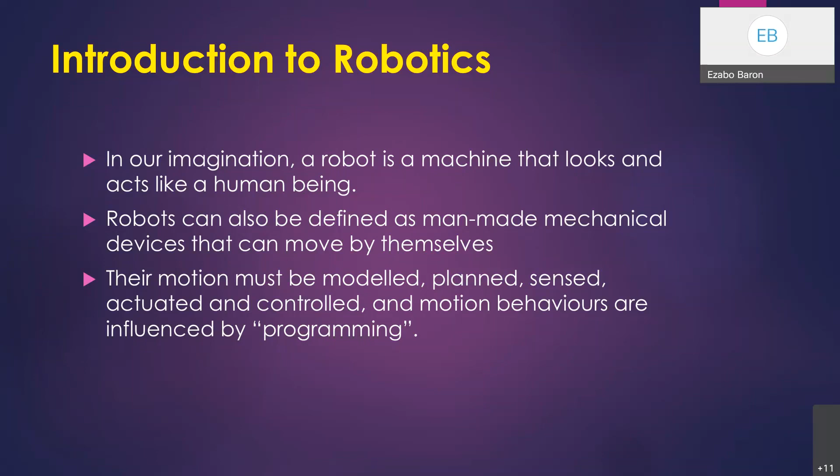We are still on the first page of your presentation. Maybe if you move the slide, the reaction didn't happen on our end. Maybe I'm viewing on my phone, I can see the slides moving. Maybe you should relog on your side. Is it the same problem for everyone? I've logged on my iPad and on the phone I'm seeing the slides moving. Maybe another participant is experiencing the same. Yeah, same problem. Okay, so I should reload the slide. Can you see it now? Okay, let me stop sharing and share again. Can you see it? I am able to see it, but still on the first page. Now what I need to do... I don't know, let me send it to you on WhatsApp, and then you upload it and share it on a computer. Is that okay? Yeah, it's okay, you can share with me, then I'll share. Okay, I've shared it on your WhatsApp, so let me stop sharing the screen, then you upload it for me. Okay, let me download.

Is my screen visible from that side? No. I started sharing, maybe... it says starting to share content, but nothing is appearing. Okay, it is now visible, I can see it. Oh, you can see the page. Yeah, and then you can make it full screen.

Okay, as we try to make it full screen, I think we are on that page. We're talking about this drone. This drone, as we said, is similar to the previous robot you saw on the cover page of my slide.

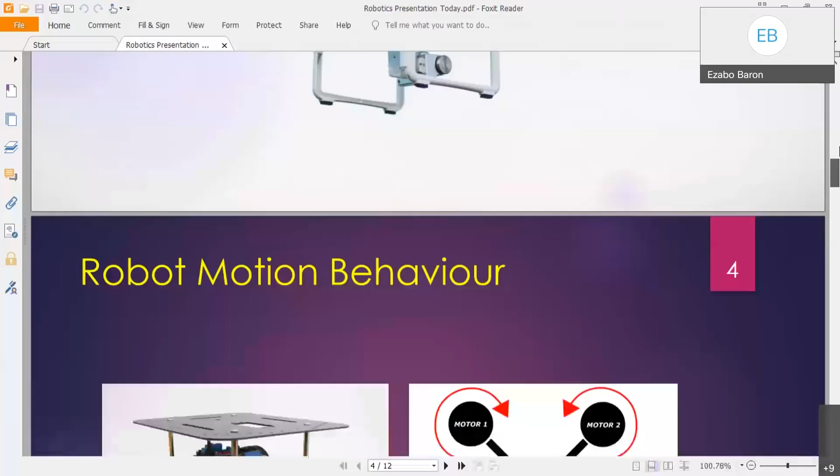Okay, it has gone off again. I think there are problems, let me check. Okay, I think it's okay now from your side. It's not. Yeah, it has come now. You can make it... okay, we are there.

So I was saying that the drone uses sensors, ultrasonic sensors and infrared sensors, for motion manipulation, object detection, and all that. But it is also incorporated with additional technologies like GPS, global positioning systems, to be able to navigate. Some have cameras attached to them. Some are remote controlled, meaning someone is either using a mobile app or a remote control specifically designed for drones. So it depends on what someone is using: a smartphone app, a drone remote control, or it is flying on its own through motion algorithms fed into it with the aid of GPS. So those are some of the important areas: sensors and also incorporations.

If you are using a smartphone to control it, then you are going to need to know how to program it using Android Studio or something like that - Java is very important. Let's move to the next slide.

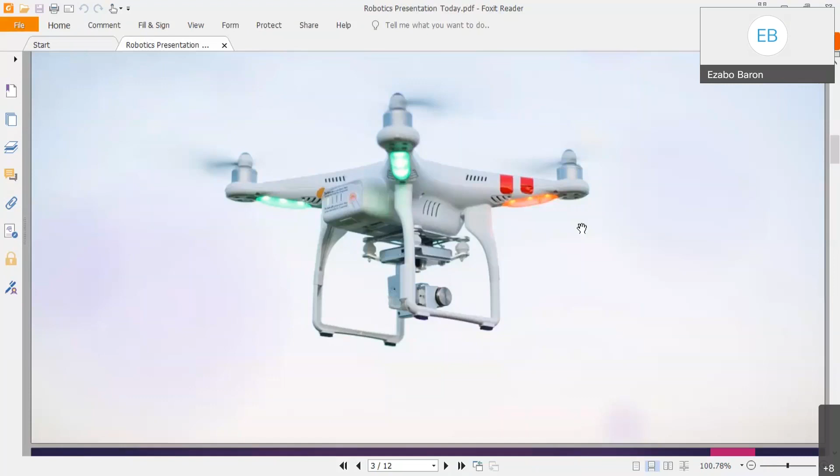Okay, so yes, here is a typical behavior of when you see this part where there's motor 1, motor 2, motor 4, motor 3. This is a basic motion manipulation technique for a drone. It is from this that you're going to be able to build any other complex drone.

If you don't know this motion manipulation technique, it's very difficult to program a drone. The same applies to a mobile robot like the car you're seeing on the screen - that also has four motors around the tires. The motion manipulation techniques I will hint at, but let's focus on this one for the drone. Let's say this motor 1, motor 2, motor 3, motor 4 are motors like in the drone. You can go to the other slide, before this one, where there was a drone.

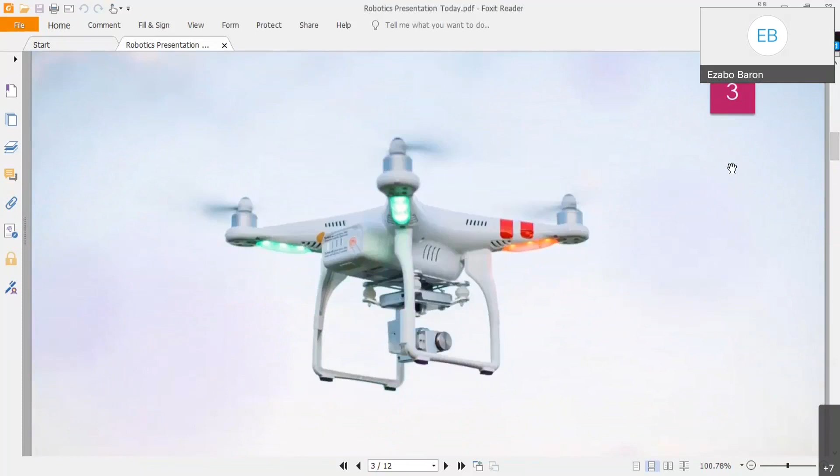Yes, this one. So this drone has 4 motors. One we can't see, but we can see the other 3. There's one behind there, so you can go back. So let's imagine those 4 motors are represented in this diagram here.

When you are going to program this drone, you see the position of 1, the direction of motor 1, and motor 1 and motor 4. No, motor 1 and motor 3 are flying in the same direction. Can you see that in the arrows, the direction of the arrows? Chris, can you see that motor 1 and motor 3 are moving in the same direction?

Yes, they are both clockwise. Yes, but they are not... are they, in mathematics, are they parallel? Are they perpendicular to each other? So you will expect motor 1 and 2 to be flying in the same direction. If you did that, the robot will not move, it will not even balance. It will just fall off because the resulting forces will overpower it and it will fall off.

So that's why we call them rotors. Rotor 1 and 3, they must be flying in the same direction. That is the basic principle of a drone. You can attach your sensors, you can put the GPS, but if you cannot manipulate the motors of a drone, then the drone will never be in the air.

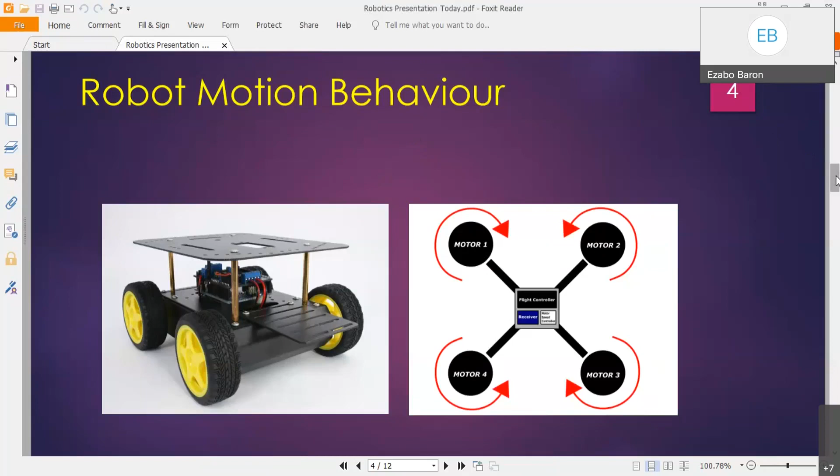So why is robotics needed? Robotics are very important in speed, and they can operate in very dangerous places. These days the military is using drones to carry out operations in places where humans could not go. Some just sit in a remote area and control it from there. Others move without human control, but most military drones are controlled somewhere remote.

Then there are those you could send into mining places, maybe tunnels where humans could not enter. You could just send in the robots and they will be able to do surveillance or any operations to rescue people in a mine that had collapsed, and there are undersea robots which could go and pick up people who have drowned or are somewhere in the water.

There's also this one used for irrigating farms, for spraying crops. Drones are now used for spraying crops in large farms where it would be hard work for humans. You can set up a drone fully installed with sprays, and it is able to fly around the farm and spray insecticides and all that.

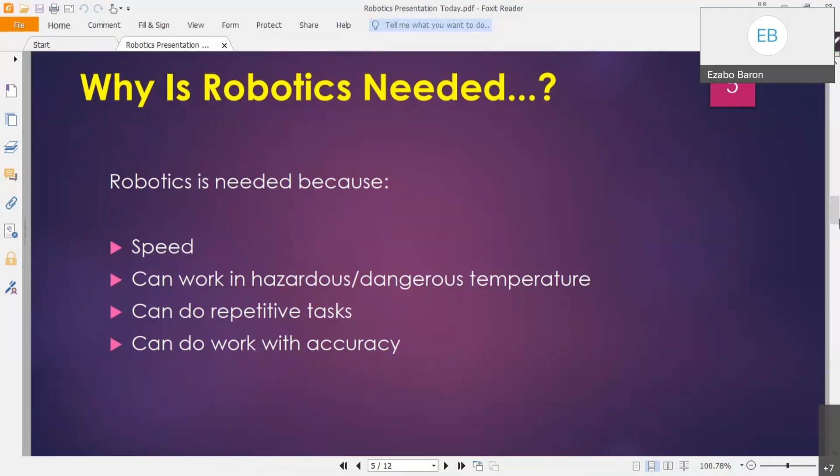So robotics technology, there are quite a lot of technologies in robots, but basically robots usually have the main body of the robot. It has the links, the joints, and other structural elements. Of course, if a robot is going to be picking something, like those used in factories, they have what they call robotic arms. Those are what you can call the joints.

Air makes robots much lighter. A problem we face with these robots is that they tend to be heavy, but air-controlled robotic arms or actuators are lighter. You've seen caterpillars and tractors using these arms, which are controlled using fluids, some sort of liquid which is pumped forward and back.

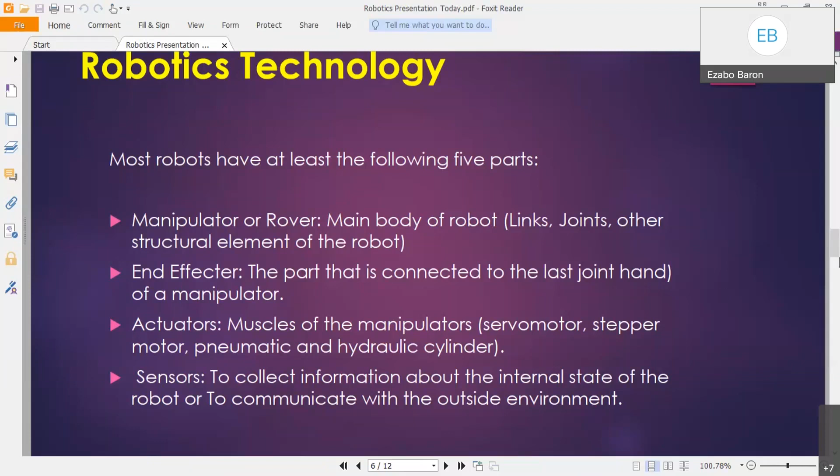So there must be processors in robotic systems - we're talking of microcontrollers, which are going to detect and get intelligence from all these physical parts and be able to coordinate it.

Obviously, if you're just using it for learning purposes, we always talk about Arduino. Arduino is always the simplest that you can use in schools. I can't say it's very simple as such, but it's affordable - it's cheap to get an Arduino board, and there are many available in Nairobi.

Then the other one is Raspberry Pi. Raspberry Pi also has popularity in many things, but Arduino and Raspberry Pi go hand in hand. Every day, people tend to use more Arduino for smaller projects, but the application of Raspberry Pi is quite wide.

Raspberry Pi uses Python, Arduino uses C and C++. C++ is used for building and expanding the libraries, and C is used for implementing the program. So knowing C and C++ when you're using Arduino is very important. Of course, that C and C++ has also been customized for Arduino, so knowing how to code them in Arduino's format of C is very important.

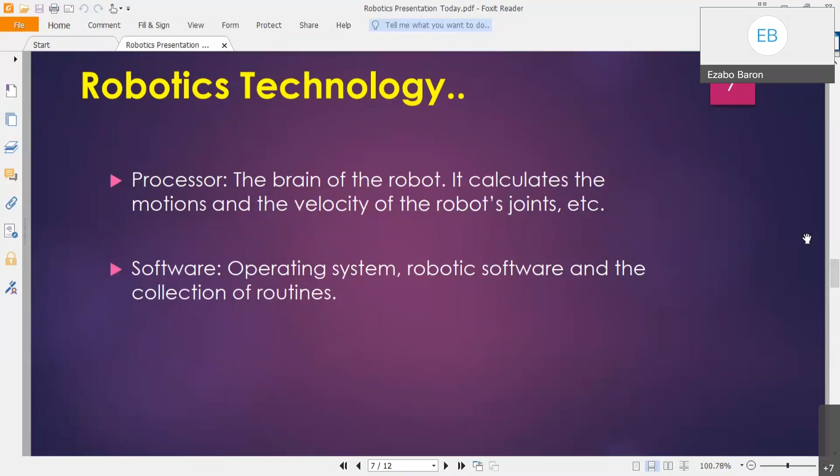Moving to the next, we're about to finish the slides. I know we are maybe about 10 or 15 minutes over, yeah.

So we talked about different types of robots. We talked about mobile robots - they could be simple robots, able to drive around. We have industrial robots, which could be stationed in one place, or able to pick packages from one place to another, or just fixed in one place. They have robotic arms used for manufacturing cars, solar panels, and other complex things. So those are industrial robots.

Autonomous robots - we talked of undersea water robots used by the marine to go for wars, to monitor, to surveil, to do research, to rescue. These robots may be controlled remotely using GPS, or they can navigate on their own. There are those drones used for surveying, for delivering emergency products like medicine, as you've seen in some East African countries where they're used.

Now you have the Konza project in Nairobi, where they're planning to use many of these autonomous robots in city management. Remote controlled robots are those which can be controlled remotely. Virtual robots - I talked of virtual robots, those virtual assistants where you don't have a physical robot, but you could have software programmed with full intelligence to serve communities online. There are those now being used by telecom companies to respond to customer queries and many other things.

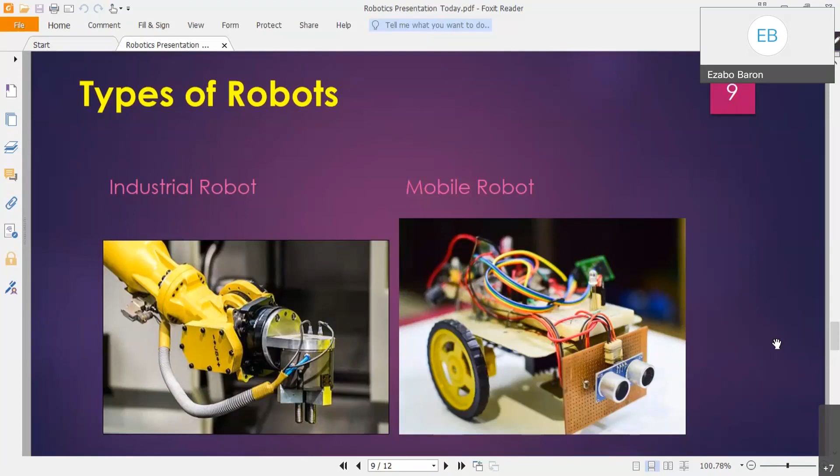But as you move into more complex robots, you have to integrate. That's where the idea of mechatronics comes in. Going to the next slide, we're about to end, then we get some time for questions.

We talked of rolling robots, walking robots. Now there are so many robots. The Sophias are walking robots, the popular Sophia robot; they have legs, they can move. There are quite many of them. Rolling ones just drive on the ground. There are also flying robots. So this is what we are talking about. You can go to the next slide.

So remote control robots—like the drones used by the military to fight and bomb—they use remote controls. Someone sits at a command center to monitor them. The drones you'll use for monitoring Konza City or Nairobi City will also be remote controlled. Someone will sit somewhere in the control center to monitor their movements, with cameras attached all over them, sensors, and all that. So those are remote controlled.

They can perform complicated tasks which humans would not easily be able to operate. I think we are reaching the last slide. You can go there and then we'll have time for questions.

So also, search engines use virtual robots. This is easier to start with. Since most of you are from computer science, this is a project you can start—building chatbots. Search engines use all this. Nowadays you could just feel lazy, get your smartphone, and search anything on Google. You turn on Google Voice and speak: 'Google, which continent is Kenya found in?' It will tell you Kenya is found in Africa.